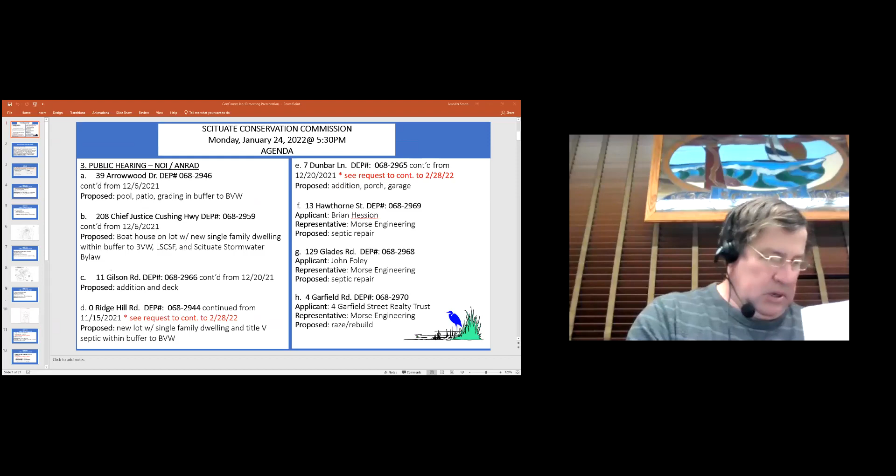On June 16th, 2021, Governor Baker signed into law an act extending certain COVID-19 measures adopted during the state of emergency. This act includes an extension until April 1st, 2022 of the remote meeting provision of his March 12th, 2020 executive order superseding certain provisions of the open meeting law.

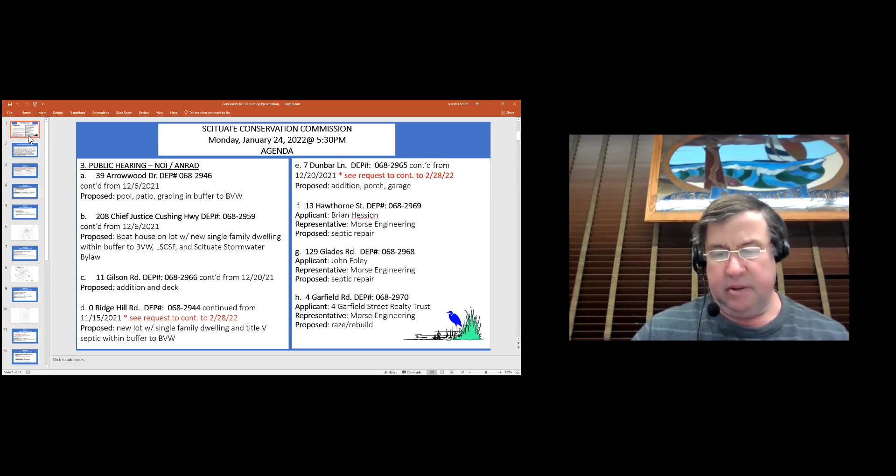So we have 39 Arrowwood.

Oh, is that Mr. Marabito? I was looking for Marabito. Oh no, here's Brad Holmes. Maybe he'll be speaking for the applicant.

Good evening, members of the commission. Brad here. Wanted to just get in front of the commission quickly. We're going to continue the meeting so we can provide some more information that Amy forwarded to us last week. I did get a chance to speak with Amy, but since we're on the agenda, I figured it would be a good idea to brief you on what changes have been made so hopefully it will go smooth through the process and the next meeting will be more efficient.

So as you remember, we have a pool and patio proposal here at 39 Arrowwood Drive. It's within the 100-foot buffer zone to bordering vegetated wetlands. The project has been revised to relocate the proposed pool and associated patio with retaining wall further north of the house and further outside of the buffer zone, so that about half of the project is outside the 100-foot buffer zone, and we're about 80 feet away from the BVW.

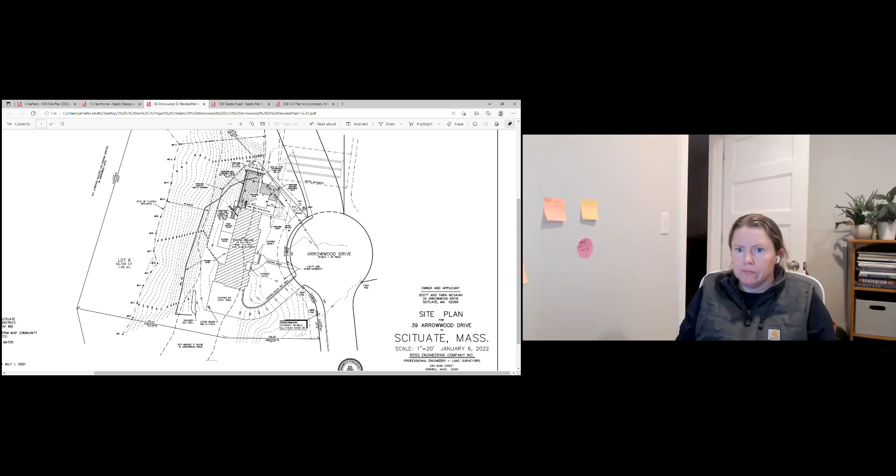Okay. Penny? No, just waiting for the information Amy asked me for. Thank you. Jen? Yep, I'm good. Brendan? I have no questions.

Amy, is this before the ZBA as well? Yes, is this the one? Yes, it is. And one of the things I was hoping—which was communicated actually via email to the applicant, but we could reiterate—is that this is a positive change that they've made. And I would say that they should definitely move forward with getting the additional detail and then back to the ZBA to see if a variance can be granted for the zoning regulation that prohibits this type of disturbance on these slopes in the Water Resource Protection District.

Because I think that's important, but it's moving in the right direction. It looks like you should be able to go with orders on this once we receive additional detail.

Okay, when do we want to continue it to, Amy? Before that, do we have anybody in the audience, as long as we have this open? Is there anybody that wants to speak to this?

No. Okay, Brad or Amy, how much time do you think we need? I had written down March 7th. Is that okay, Brad, with you?

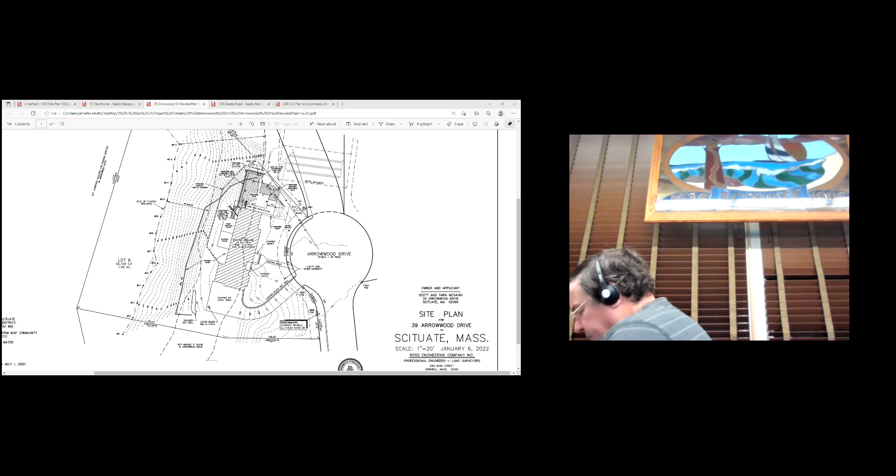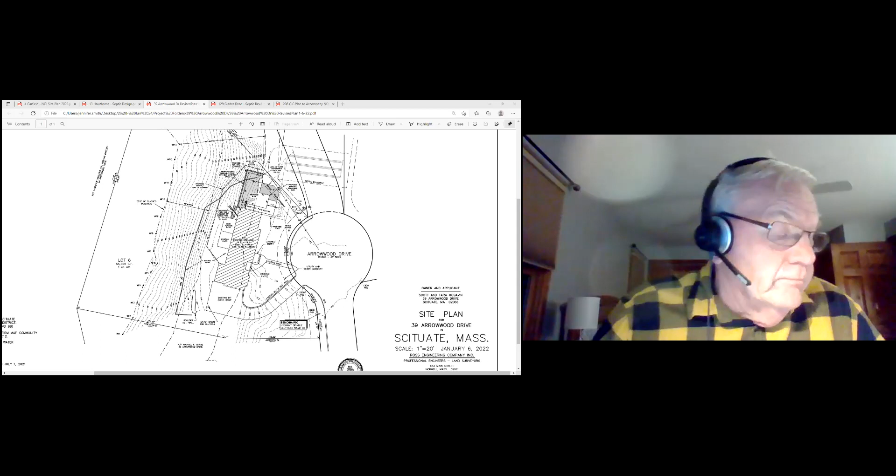Frank, does it have to clear ZBA before us, or do we go before them? It should clear, I think. They're looking for all other direction from permitting agencies before it comes back. The ZBA has asked us to get through conservation first before we go back to them because we're kind of in that catch-22 scenario.

There was a letter from the chairperson of the ZBA on this one, wondering what our issues were and could we move forward. So I don't want to leave someone in that lurch.

I think it's important that we've now shown the ZBA that this is something we'd have less concern about, and can probably condition with additional information, which should be good enough for the applicant to go back to the ZBA and see if they can overcome the variance that is required.

Well, do we have a lot on for the 28th? Just to hopefully move this, this has been out there for a bit, and it looks like they made pretty good changes. Do we have a lot on for the 28th yet?

Yeah. I had written it down as the 7th. But if you want to put it on the 28th, that's somebody that's not going to get to go on the 28th, but that's fine. Well, this one's been out there for a while, so.

So I'll make a motion that we continue 39 Arrowwood -- hold on a second, we do have a hand up here somewhere. Oh, I think you gotta press the button. Yeah, sorry, it doesn't let me unmute myself.

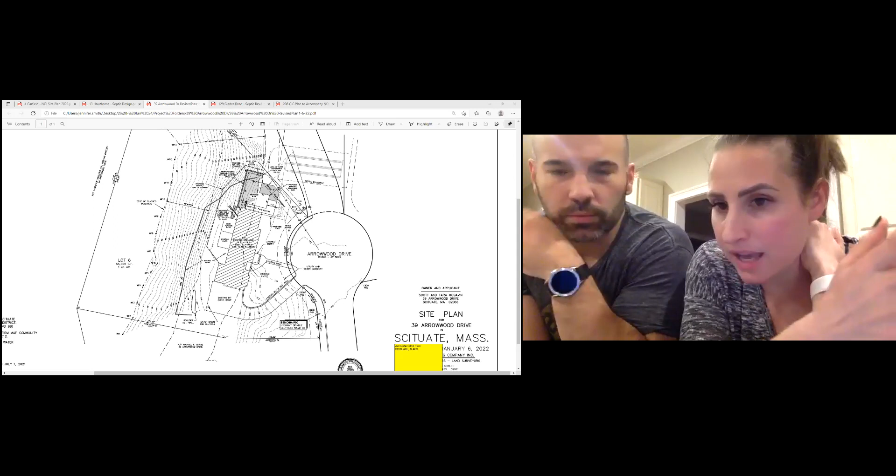Yeah, we just wanted to know, because Anthony Bucari from ZBA had specifically requested we get approval from the commission before going back to ZBA, would we be able to get anything from the commission in writing that we could forward to the ZBA before we go back to them again and then they send us back?

I've already sent it, in the email I sent to Brad. Okay, that should be fine, Tara. Okay, all right, thank you, Amy.

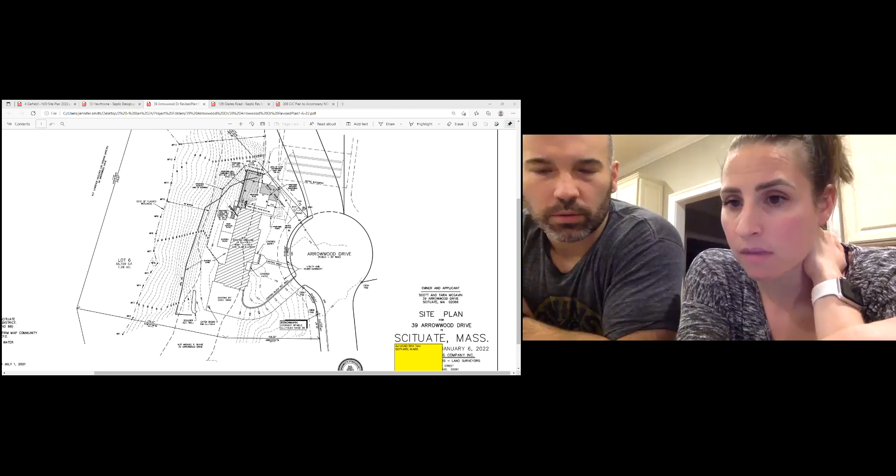All right, okay, so Penny, you have a motion to continue to the 28th. Yes, I make a motion that we continue 39 Arrowwood to February 28th. Okay, do I have a second? I'll second it, from Richard. Yep. All in favor? Jen, yep. Brendan, yes. And Frank, yes.

Okay, thank you, thank you very much. Thanks, two other ones, yeah. 208 Chief Justice Cushing. Somebody from Morse Engineering?

Anybody there? Yeah, I have Greg Morse and also Peter Palmieri on the call. Oh, good, just got unmuted. Good evening, this is Greg. Hi, Greg, good evening.

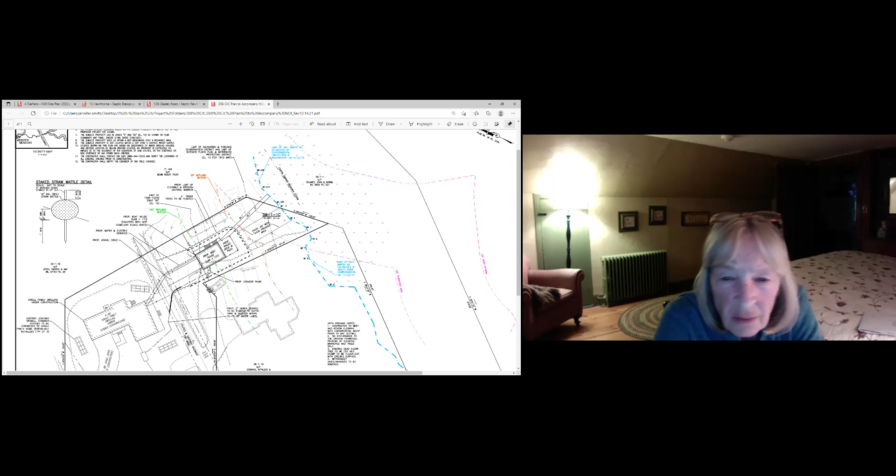You want to start, Greg? Sure, this is a continued public hearing for 208 Chief Justice Cushing Highway. To refresh your memory, my applicant, Sean Pacheco, is the property owner here. He began construction on his single-family home last year. This year we made application, however, for a detached boathouse. It's approximately 20 feet by 30 feet. It's located inside the buffer zone, which prompted us to file a notice of intent.

The wetland resource areas out here -- you had us retain Sabatia, Bob Gray, to go out on behalf of the Conservation Commission and review the wetlands.

I believe Bob Gray is in agreement with the wetlands we delineated on the site, which consisted of a bordering vegetated wetland, shown in blue, and the riverfront area, shown in purple. We're outside of the riverfront area with the boathouse, and the FEMA flood zone also traverses the site. Addition of this boathouse also put the project into a stormwater bylaw requirement.

The home construction was exempt from the bylaw because the home itself disturbed less than 15,000 square feet of land. However, when we added in the boathouse, it put us over that 15,000 square foot threshold.

Mr. Pacheco, when he built the house, had already installed significant roof dry well systems to infiltrate the roof runoff, even though he wasn't subjected to the stormwater bylaw. We'd add that this site would not be subject to rate and volume control, as it discharges to land subject to coastal storm flowage anyways. The soil out here is sandy.

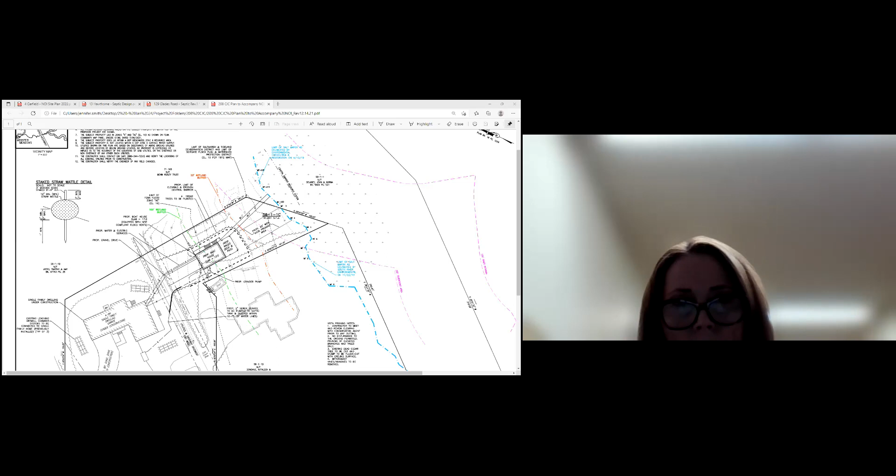So I don't see him on the call right now unless he's on a phone number. Peter, can you somehow identify yourself? Otherwise, I'm not sure if we should come back to this, but there were outstanding concerns relating to TSS removal and the entire site as a conglomerate, or an aggregate, I guess you could say. I was hoping Peter was going to speak, but I don't see him on. So maybe you should go through the commission. Oh, nope, here. Have you got them?

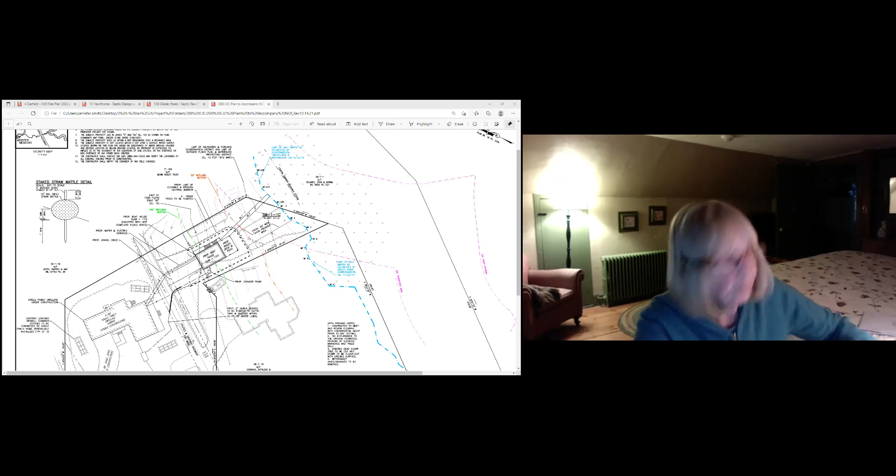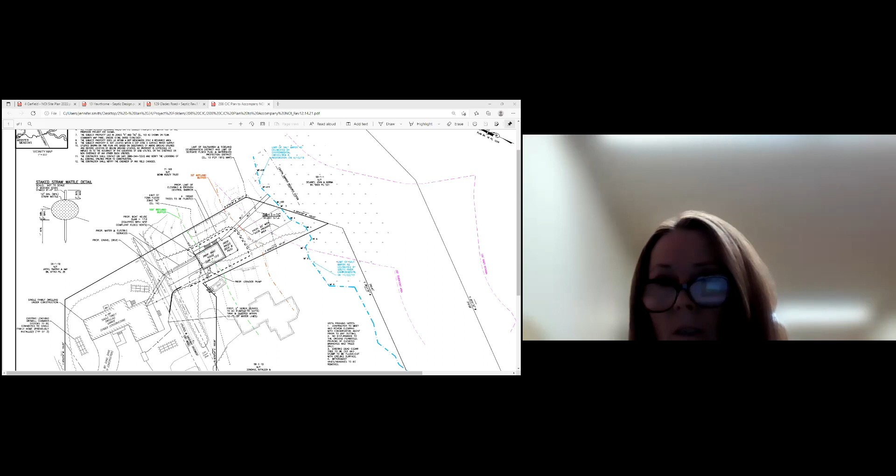Amy, we have Gilson Road and it looks like Greg's back on again for Zero Ridge Hill. So do we want to do Gilson Road? Yeah, that sounds good. Greg, and then we'll just circle back? That's fine. Well, yep, wait a minute, now there's a hand raised, so hold on. Joan Wyckoff? Yeah. Okay, hold on. You've got a Peter with his hand raised as well. Okay, we're going to go to Peter with his hand raised. Right, that's what I was going to tell you. He's there. Great, thank you. I was trying to get your attention.

Peter Palmieri from Merrill Engineers and Land Surveyors. As Greg has indicated, we did do the stormwater review for the project. As far as the post-development, pre-development, and recharge requirements, we're satisfied with the design as presented. We did have a question, though, relative to total suspended solids. Since this project, with the addition of the boathouse, exceeds the threshold for the stormwater bylaw, we feel the applicant should be addressing the TSS removal. Greg had indicated in an email that they feel there's a depression on the site which will perform this function, though I'm not sure exactly where it is. Maybe he could address that further.

I do think if the commission believes that both the single family house and the boathouse are one project, then the TSS should be addressed in some method or presented on the plan as something the commission members can digest.

Go flip back to Greg. Sure, I'm glad to speak to that. Thank you, Peter. We looked at this as two separate projects. We already have the building well under construction, including all of the site work associated with the building. The lot's been graded, the roof dry wells have been installed, the septic system's been installed, all utilities have been installed. The site is just short of loam and seed at this point. But other than that, the site is predominantly done associated with the house. The house did not require any review under the stormwater bylaw because it was under the thresholds. So when we made the application for the boathouse, that puts us over the thresholds. We look at the boathouse as being the trigger, and that should be the subject of the stormwater bylaw.

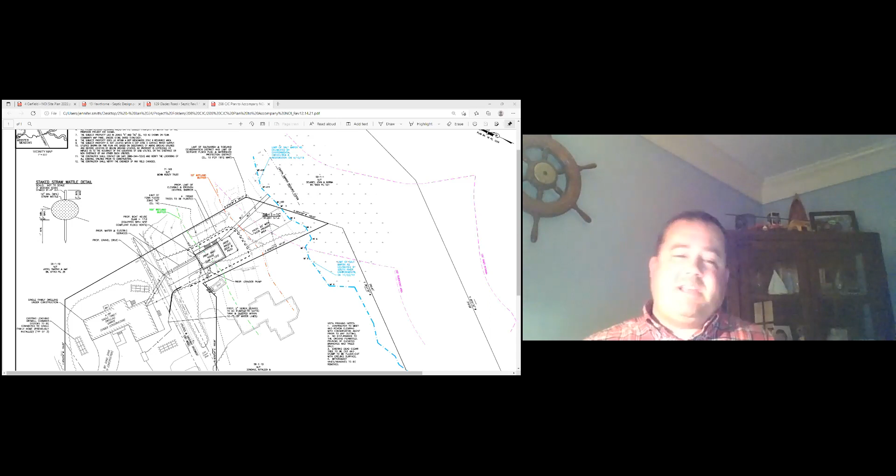TSS is not that big of a concern in a residential application. Off of a residential driveway, what are we talking about for TSS? There might be a little bit of sand if someone puts sand on their driveway for de-icing in the winter. But other than that, there's really not a lot of pollutant load we'd be concerned about with TSS removal on a residential driveway.

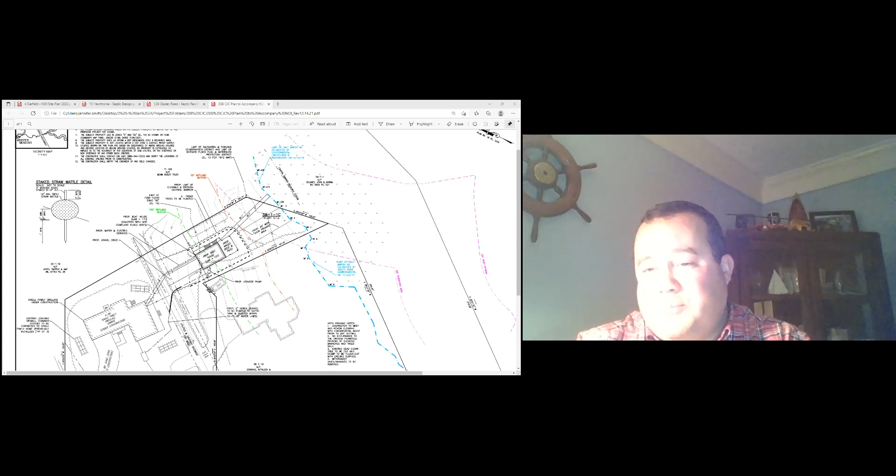This site, if you look at where the driveway drains to the front of the lot, there's a natural depression along the edge of Route 3A where it was built up. You'll see the existing driveway comes in at the bottom left corner of the lot. Just to the right of that driveway is where a natural depression exists. So if there were any suspended solids coming off this driveway, it would be trapped within the natural vegetation and utilize that vegetation out there.

I didn't see TSS as a big issue on this application, nor do I think that should be the subject of the review. I think we're here specifically for the boathouse, which doesn't propose any impervious surface that would have TSS whatsoever. It's a gravel driveway for the boathouse, and it's a roof, which is considered clean runoff.

I did email the conservation agent asking if there were any outstanding issues and asking this very question on January 7th. I was surprised that it came up tonight. I did not receive a response. I was not anticipating this being an issue this evening.

So Peter, with that being a gravel driveway for the boathouse, is the driveway gravel? Yes, the boathouse driveway is gravel. The driveway for the house will be paved, and it's going towards the road.

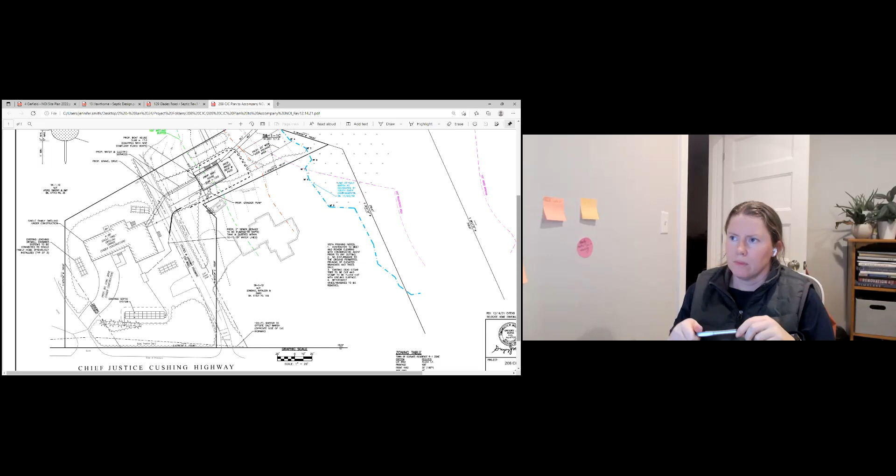They backed their way into the stormwater applicability with area of disturbance, and that's why it's important that they meet the intent of the stormwater bylaw.

As far as TSS goes, Peter and I were talking about the depression, where I'm still not sure if Greg answered it. Is the depression going to help with TSS on that part of the site? I don't think he did, because he's only addressing the boathouse, but maybe you can condition that depression by the side of the driveway to stay. I think this is a little bit technical and should probably be a sidebar between the engineers, but it's a single family residence and we shouldn't be spending an abnormal amount of time on it. Hope that helps.

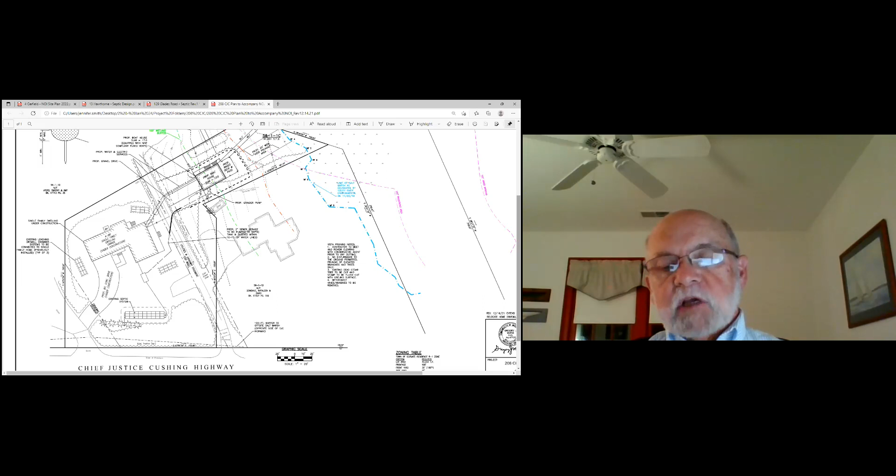First, I guess the question is whether the commission's going to view this as one, both the boathouse and the house as one project. If they are, TSS should be addressed. One way to address that could be that possibly some language could be submitted, maybe even an easement that would protect that depression so that it wasn't filled in and would continue to provide the TSS removal Greg had indicated it was going to provide.

Thanks for that, Peter. Brendan? Yeah, I guess it feels like a gray area, but I'm okay with this, like what Richard said.

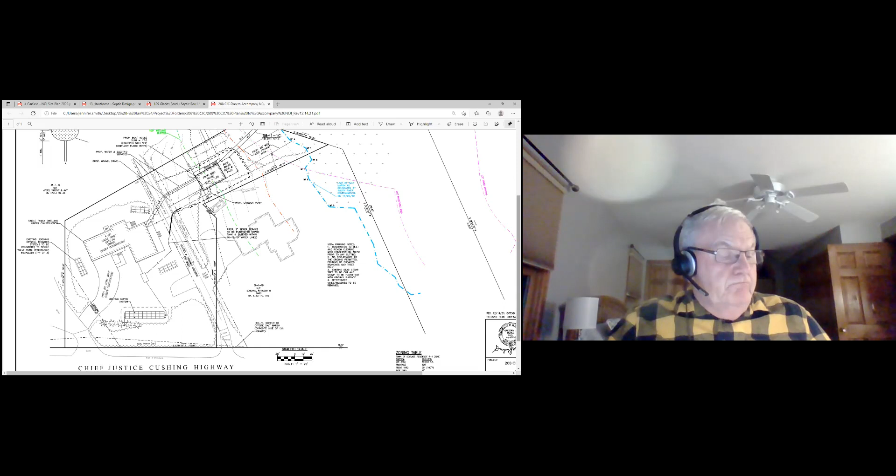Couldn't we, as Peter just said, make it a condition regardless that the depression has to stay? I think so. But before we try to solve the problem, I thought we'd hear from everybody. This just seems like it could be a solution, but I wanted to run around. I've got my thoughts on it, but I'm going to give everybody the opportunity to speak to it, like another round.

If the driveway was on the other side, I might be concerned. But the way I look at that site, when I go by, any runoff from that driveway is not going to get down to the marsh. It's going to come forward towards 3A. So I just don't see it as making it a problem. But put in the order that the depression will stay, then it takes care of it — there will be a place for any runoff to go.

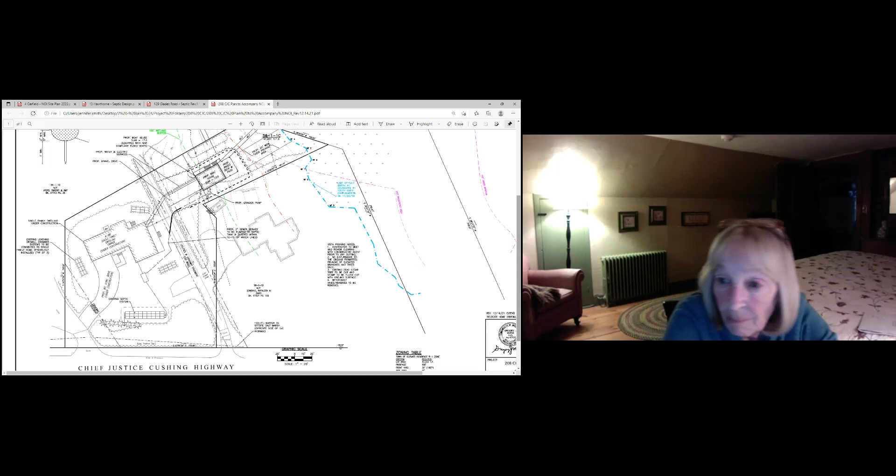If I may add to that, Greg Morse here. Along Route 3A at this location, there already is a 50-foot green belt in the Scituate zoning bylaw. We're not allowed to alter the grades or do any significant vegetation removal, so that depression absolutely will stay — that's already written into the zoning bylaw. That's why our limit of clearing is shown where it is. That depression will take all the TSS of 3A in addition to this site. There's no TSS coming off of a residential driveway.

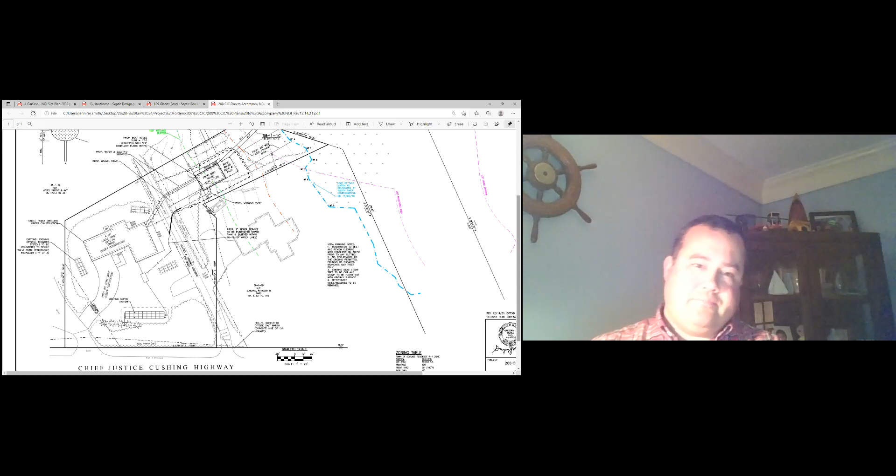Do we have anybody in the audience that wants to speak to this? I don't see anybody. Okay.

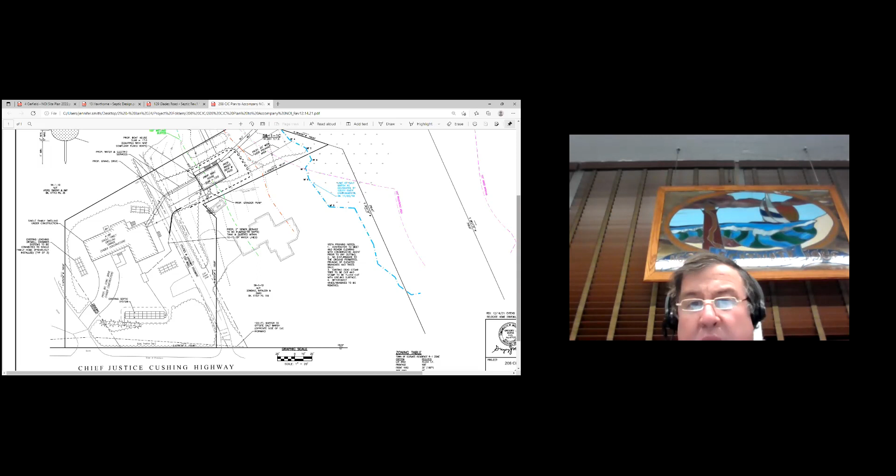Greg, I like to hear everybody's argument, and I think if this were a home being built or remodeled, and we were skirting on the threshold of substantial improvements requiring us to bring the whole house up to code, and we stayed just under that, then came back to the building inspector with an additional addition, the building inspector would tell us we had to bring it to code. I think that's how I would look at this project — it's under construction, it's another piece they added on, but I do think it needs to be treated as a whole. I don't think you can really come back with something like that.

That said, I understand the frustration with some of the regulations when it seems like overkill, adding too much to a project that could handle its own issues. We've had that happen several times — a tiny site that doesn't trigger stormwater can be more detrimental than a large site like this one. If Peter feels that's adequate to handle this, the rest of the site seems like they're doing a good job. I just wonder, and I understand the piece you're saying, that they shouldn't be able to alter anything within 50 feet of 3A.

Could this be something placed in the orders, or some definition? So they're going to be getting a stormwater permit as part of these orders, which triggered the stormwater bylaw, right? So it's going to act also as a stormwater permit, recorded under the deed of the property, and we can condition it. Okay, Peter, I appreciate your thoroughness in looking at this for the commission. I think I would agree with you, but if we can move this along, it seems like we're splitting hairs a bit.

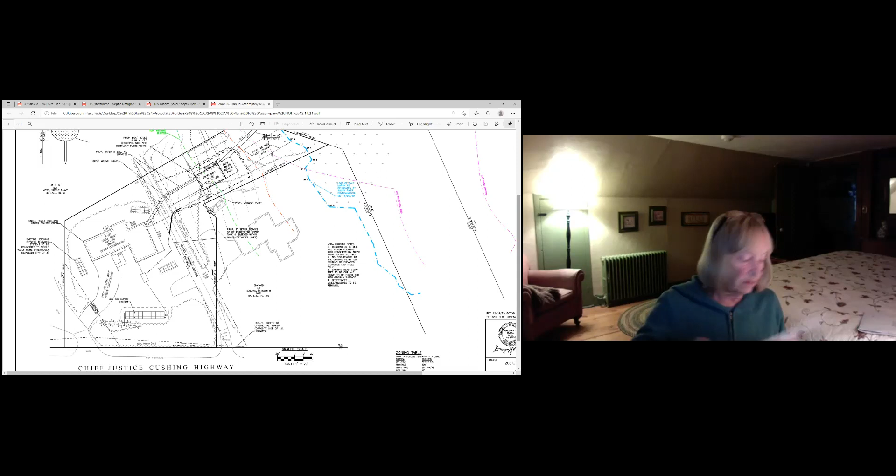Anybody have anything else to add? I'll make a motion. Penny, Amy, are we good to close this with those pieces in place? I think I understand everything. Okay, I'll make a motion to close, that's Penny. Do I have a second? Second from Jen, thank you. All in favor: Richard, yes. Brendan, yes. Frank, yes. Thank you very much. Thanks, Peter. Thanks, Greg.

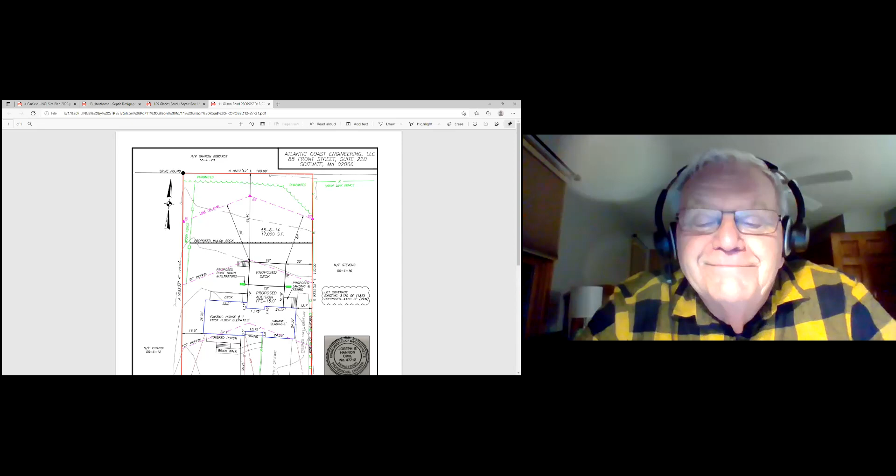Hello Jed. Okay, so if you recall, back in December, this is 11 Gilson Road, we had a few issues on the plans we needed to address. This project, just to refresh your memory, is for a proposed addition, 28 by 14 foot, along the deck in the rear, 28 by 18 with a staircase. There are no ZBA thresholds we need to address, it's compliant with ZBA setbacks. The proposed foundation has flood vents in accordance with FEMA requirements. The downspouts will discharge below grade with 3/4 inch stone detail. We addressed the 50-foot and 100-foot buffer concern that you folks had, as well as the lot coverage percentage.

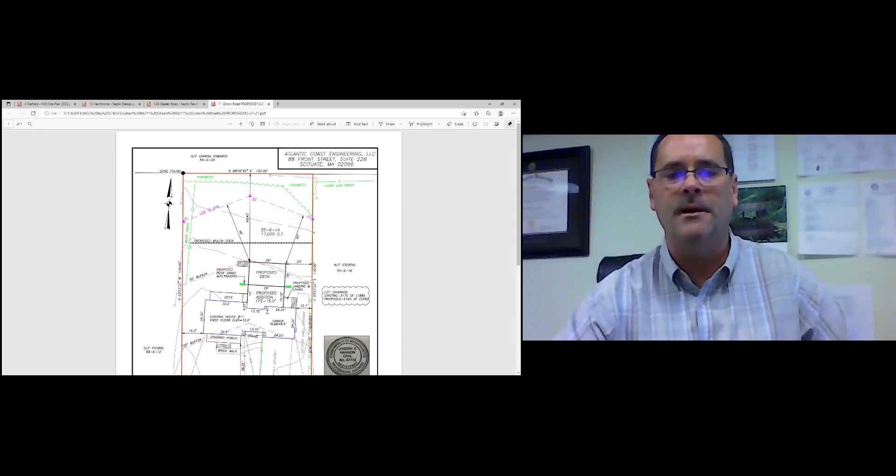If you look at the deck in proximity to the 50-foot buffer, one of the corners of the deck is about 40 feet from the BVW and the other is about 48 feet. If the commission's amenable to it as is, there's sonotubes proposed, but if it sounds more amenable, we can do helicals in order to eliminate any excavation. I'm sure you folks are familiar with that - it's basically like an auger bit that gets torqued into the soil below and has a very strong axial capacity. So at this point, I think we've addressed all the questions, comments, and concerns you folks brought up, and I'd be happy to answer any more questions.

Amy, do you want to comment on any of this first, before we go to the members? Well, sure, the big thing that happened was they tied flags on the site, and they're on the plan now, so you can see the closest distance to the deck, which is proposed under this notice of intent, is 40 feet. It's by footings, but it's also my understanding that because of construction costs, there's a good chance this project's not going to happen. But I think you're good to close.

Unless you want to see some improvements, given the encroachment into that 50-foot buffer, although it is on pre-existing lawn. Okay, well...

Jen, do you have any questions or comments? Sorry, it took me a second to unmute. I am always in favor of plantings for encroachment, so if there was something that happened there, that would be great from my perspective, but otherwise I'm good.

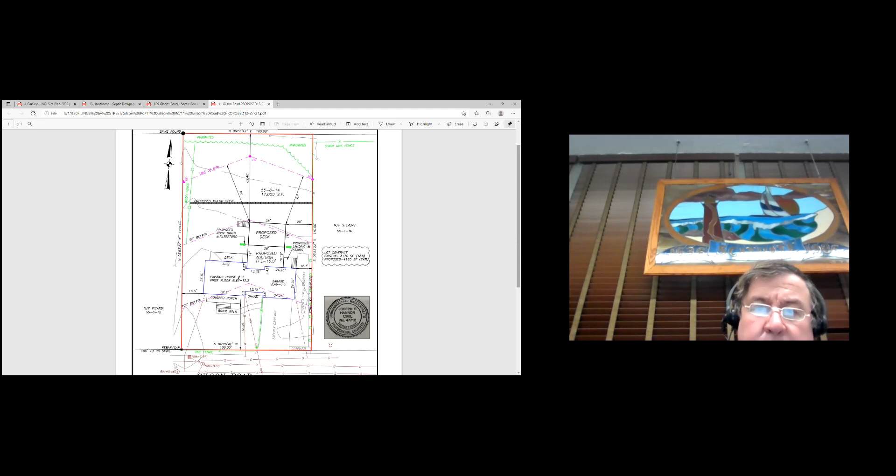Brendan? No, I don't have anything additional. Penny? Nope, I'm happy to see the plan with everything on it so we can see and understand it better. I think it's good to go. Richard? What Jen said, otherwise I'm fine, it's all grass.

Is there anybody in the audience for this one?

Being none, Frank said: Jed, a couple of things. The plan that got submitted the first time, to me, was kind of misleading. The arrows pointed to locations that would have indicated that both the deck and the addition were out of the buffer, which now with these lines on there, we can see that's not the case. So hopefully in the future, we'll get those things right the first time and save you and your clients some time.

And then I think it's good with the infiltrators. I'm really not that concerned about using helical piers over sonotubes, whichever is more economical, as long as the area of disturbance is minimal. But I do think that Jen and Richard both requesting some mitigation when we allow someone to construct something inside the buffer zone, that we get some mitigation for that. And there wouldn't be any reason that some plantings couldn't be placed.

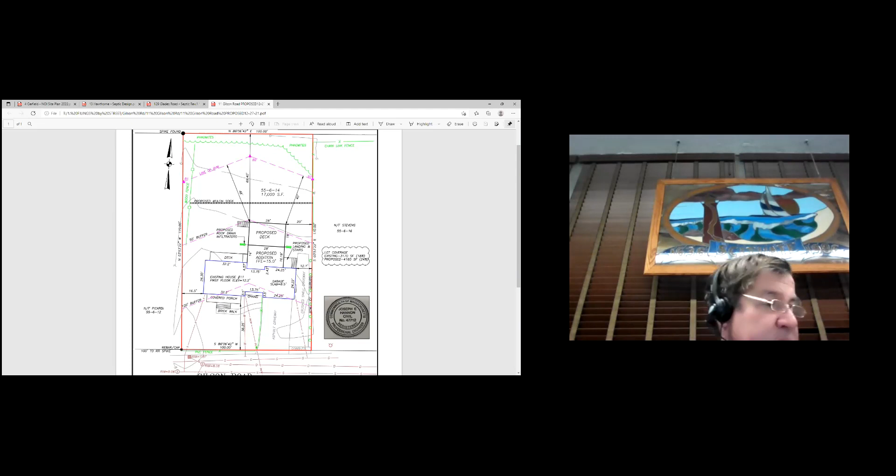Who delineated the wetland for you, Jed? Brad Holmes. I'm wondering if Brad could come up. I'm not opposed to closing this with something for mitigation, but something that maybe you and Brad could work out that the commission could approve. Yeah, absolutely. Thanks for the feedback.

And that stuff, we've done that with Brad in the past, come up with a mitigation plan for plantings due to disturbance in the BVW area. So yeah, that would be fine. I can certainly get with him and come up with a plan. If you folks would be open to closing, and we can get that over to Amy. Did I see somebody with a hand up?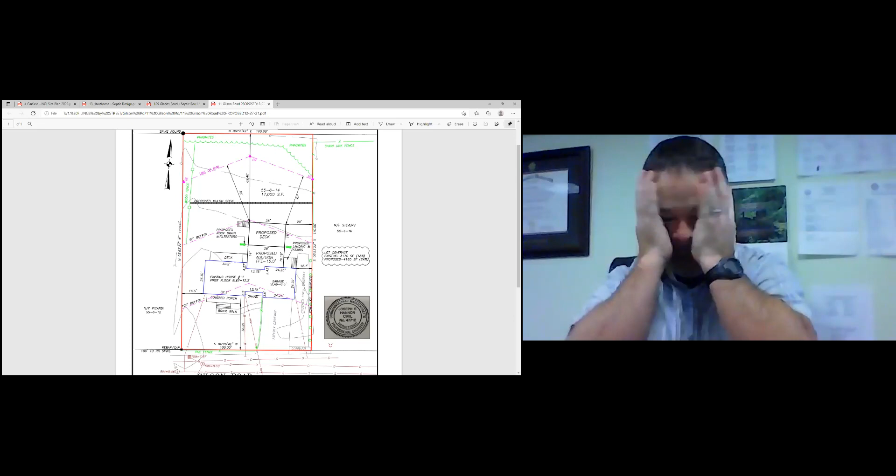Sure, understood. So this is fairly common to provide mitigation. Brad does this on a regular basis, and we work with him on this on other projects. So yeah, it's definitely something we could put together that you folks have seen before on other projects, and we'd prefer to close tonight, subject to receiving an acceptable offsetting mitigation plan for plantings and or phragmites mitigation.

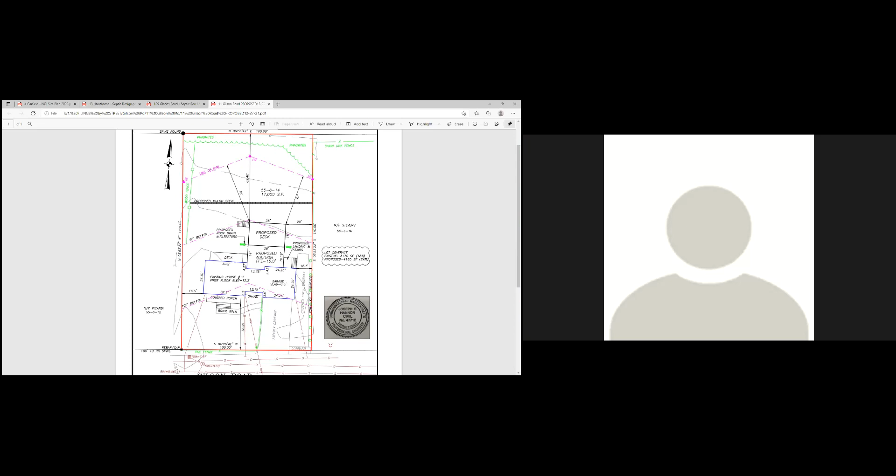Thank you. So it'd be closing with a condition for the plan that we just talked about, but that plan would go back to a meeting for your approval. Yep, okay.

All right, Penny? Yeah, just to let Jeb know, to tell Brad, I believe you're speaking of the Hadley Road phragmites. Yep, that they're cutting back. They just keep cutting and cutting. But talk to Brad, because he did come up with a good plan there, and it isn't a fortune. Okay, Jed? Okay, will do.

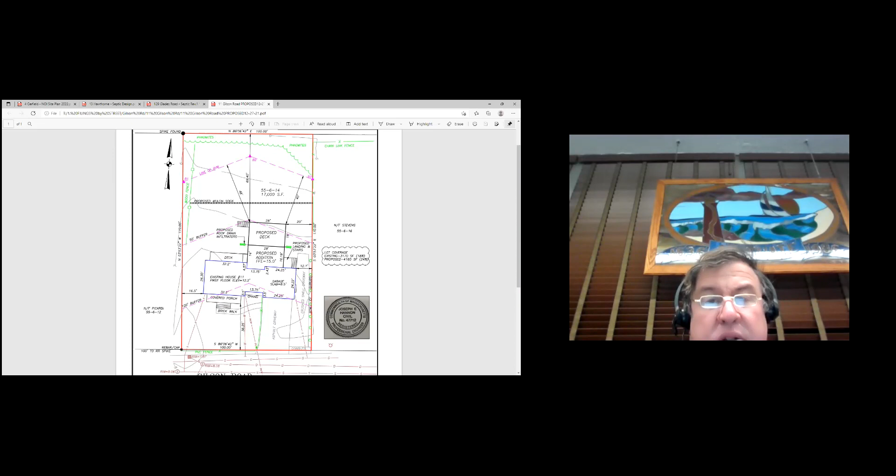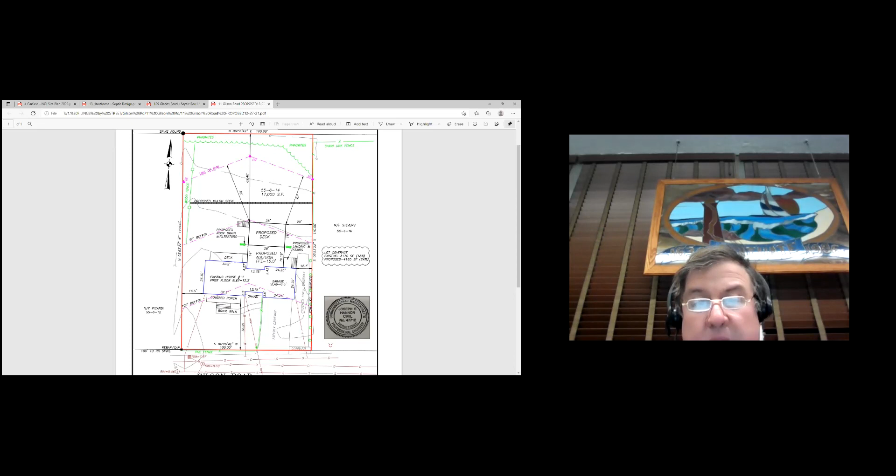All right, somewhere between all this, there's been mention of letting things become natural up to the BVW. There's cutting of the phragmites, there's some planting, so the commission's gonna have to approve whatever you put together. I think meeting with Brad and knowing those parameters, you guys could be creative and come up with something that would work for the property owner. Absolutely, okay, thank you.

I'll take a motion. I make a motion to close. Second from Penny. All in favor? Jen, yep. Brendan, yes. Frank, yes. Great, thank you.

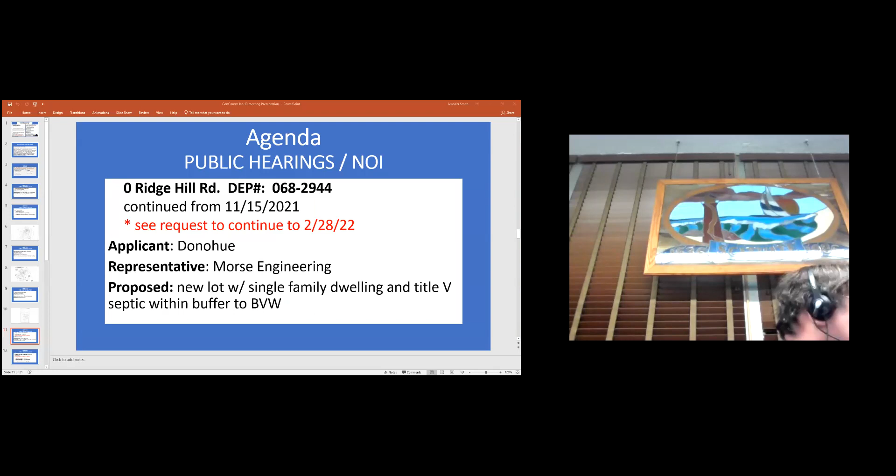0 Ridge Hill Road, that's continued. That is gonna get continued to March 7th. I make a motion that we continue 0 Ridge Hill to March 7th. All in favor? Richard, yes, you made a motion, I needed a second. I second that, thanks Brendan. All in favor? Richard, yes. Jen, yep. Frank, yes. Thank you.

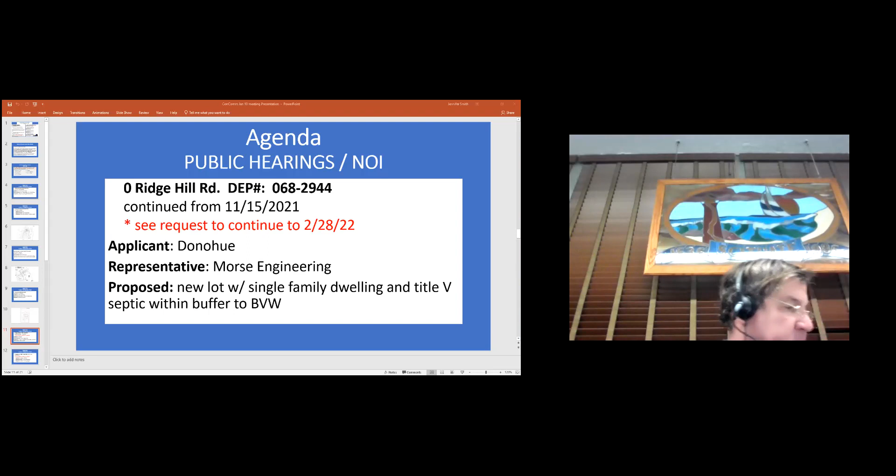7 Dunbar Lane, and the applicants requested that we continue this until the 28th. Amy, I know we've gotten lots of input from abutters and there's a lot of concern for this, so are the abutters aware or will they be notified? Yeah, we'll keep them in the loop. So this one's gonna be February 28th. Okay, sounds good. I make a motion we continue 7 Dunbar to February 28th. Second from Jen. All in favor, Richard, yes.

Brendan, yes. Frank, yes. Wait, 13 Hawthorne, someone's hand was up. So who was, do we have a, Greg Davy has his hand up. Okay, Greg, can we let him in? Who is he? I'm an abutter, Greg Davy. I'm an abutter at 51 Parish Road to the right, the 7th property.

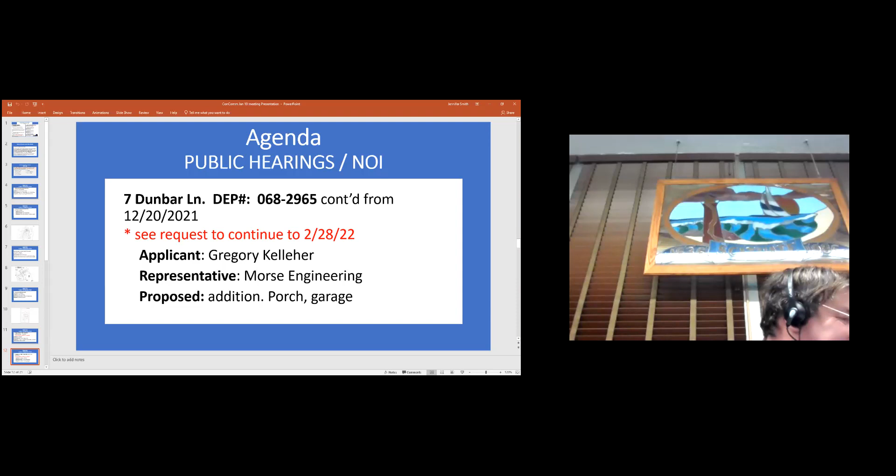Okay, I'll second that. Thank you. All in favor? Richard, yes. Jen, yep. Frank, yes.

Okay, so 13 Hawthorne, septic. This is Morse Engineering, so I'll get started.

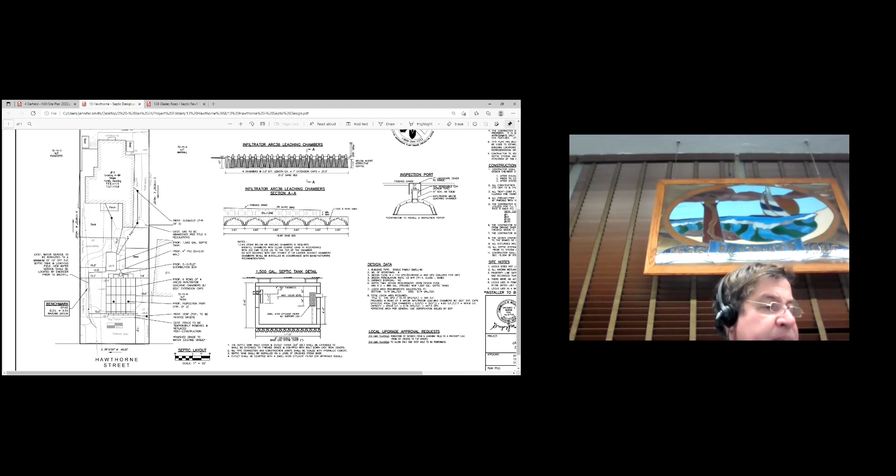On January 24th, 5:30 PM, the Town Hall, Scituate Conservation Commission will hold a wetlands hearing under Chapter 131, Section 40, Mass General Law, and Section 30700, Town of Scituate Code of Bylaws, regarding the application of Brian Henson for work related to septic repair at location 13 Hawthorne Street, Scituate. Abutters and other interested parties are invited to attend. Information on access to virtual meetings is available on the agenda posted on the town website.

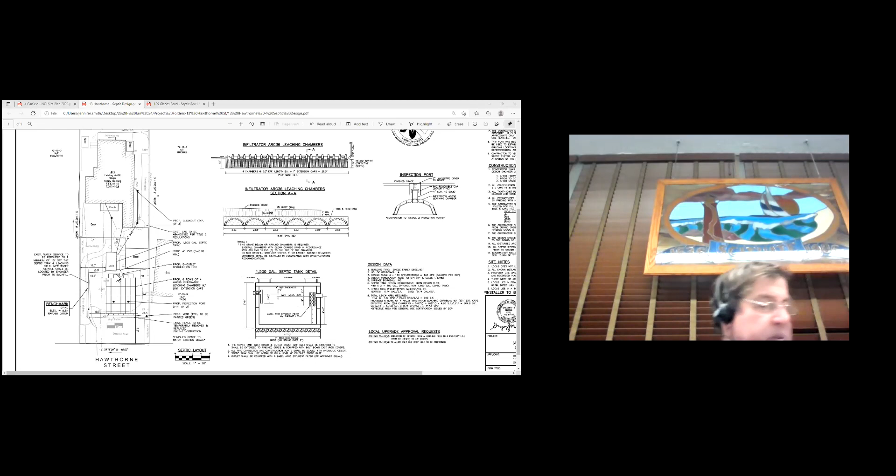Easy, Penny. So we have Brian, Morse Engineering - sorry, this is Greg Morse, registered engineer, Morse Engineering, representing the property owner, Brian Hessen. This is a septic system repair project located at 13 Hawthorne Street, in the Humarock section of town.

The existing home, as you see on the site plan, is an existing 4-bedroom home. It's located in the FEMA flood zone at AE elevation 13. For reference, the site varies between elevation 9 and 10 on the ground. The existing septic system is a series of 2 cesspools located in the backyard.

The proposal is to put in a Title V compliant system consisting of a new septic tank, a distribution box, and leaching chambers. The grading over the system where this is proposed is currently lawn surface. It would go back as lawn surface. There's really no change in the topography - the existing versus proposed contours remain the same. DEP had no comments on this. I turn it over to you.

Thank you. Brendan? Or Amy, you want to tell us what your thoughts are? Yes, okay, so...

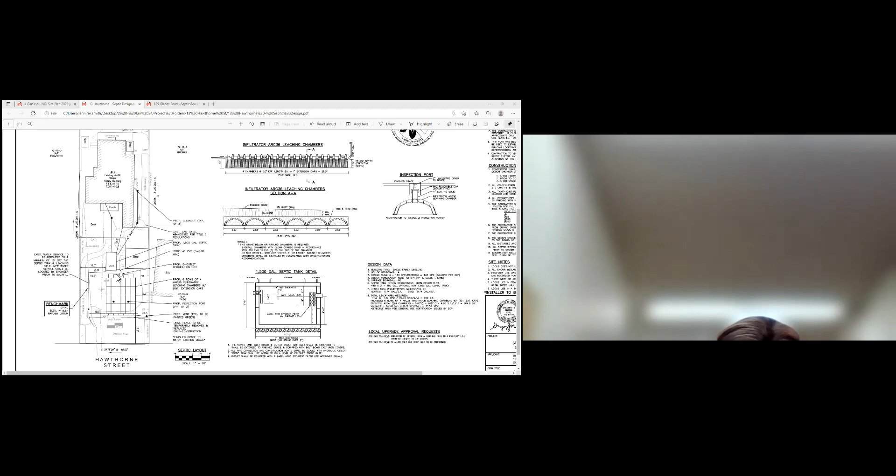Septic improvement, no board - I mean it has board of health approval, no DEP comments, appears to meet the requirements of the Wetlands Protection Act and Scituate bylaw for the Barrier Beach flood zone.

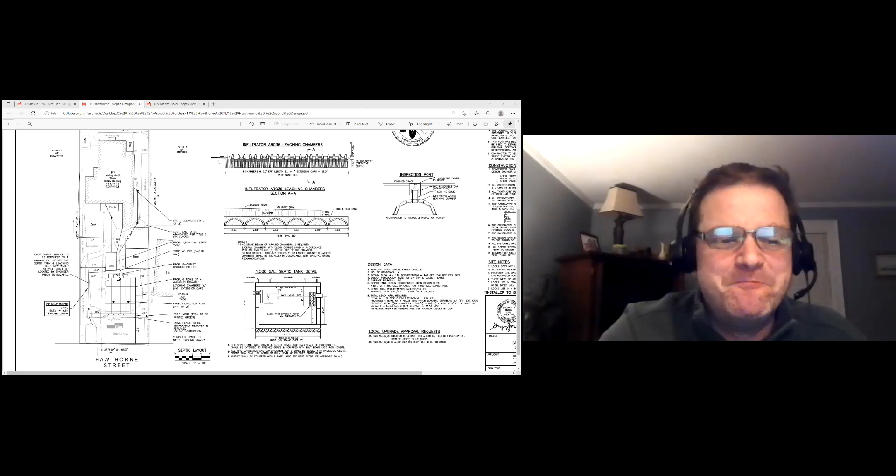So, Brendan? Going first, I really want to have a good comment. This one's a fairly simple one. Yeah, it was like, oh, no comment - everyone else said everything great, so I have nothing. Oh, it's good to say something like, a new septic system's a major improvement and protects the groundwater. This is great, I'm glad to see it. Thank you, there you go.

Jen, you want to add to that? Of course. I'm looking at it, and I know sometimes it makes sense and sometimes it doesn't, but do we need erosion control anywhere here? I'm just not sure if I'm seeing it.

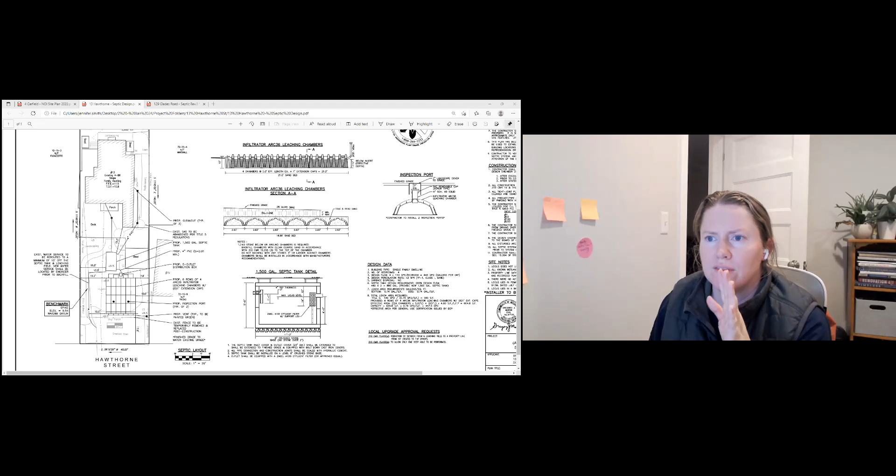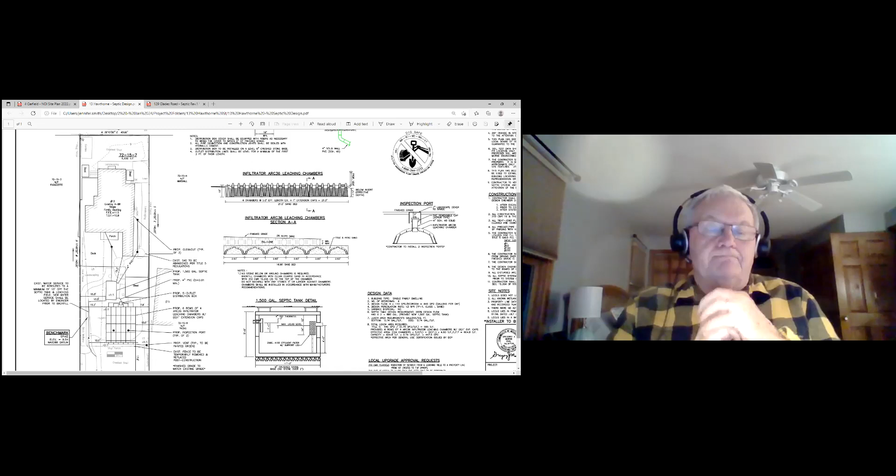I don't think on this site. No. These are right, really tight sites. You're right, gravel. That's fine - there won't be any need at all. Unless they overstep their bounds onto their neighbors, then they'd need a fence instead of erosion control. No, there should be enough room to do everything without any problem. It's very flat in that area. I don't know why I didn't go to Richard first - he's the expert down there. Don't know about experts. It's a really nice location, nice house, and this is needed, so it's good.

Anybody in the audience? I'm good with everything here.

Seeing none, take a motion to close. I'll make a motion to close. Richard, second? Second. Penny got it. Jen, yep. Brendan, yes. Frank, yes.

Thank you. Thanks, Greg. Thank you.

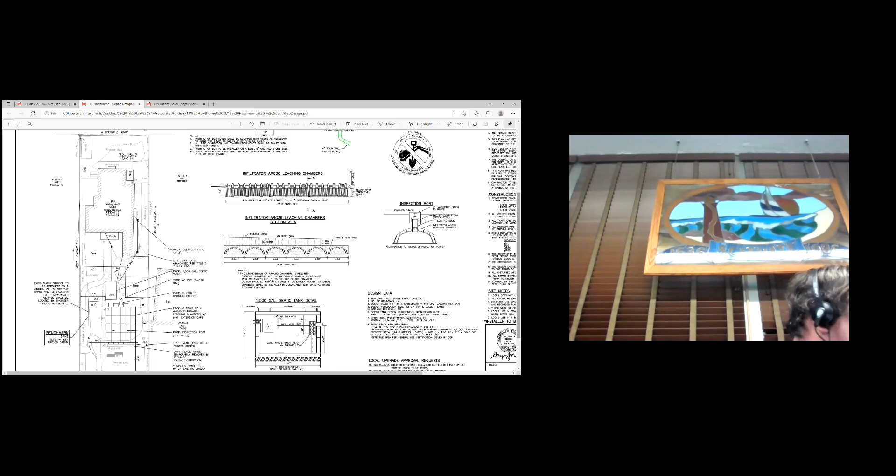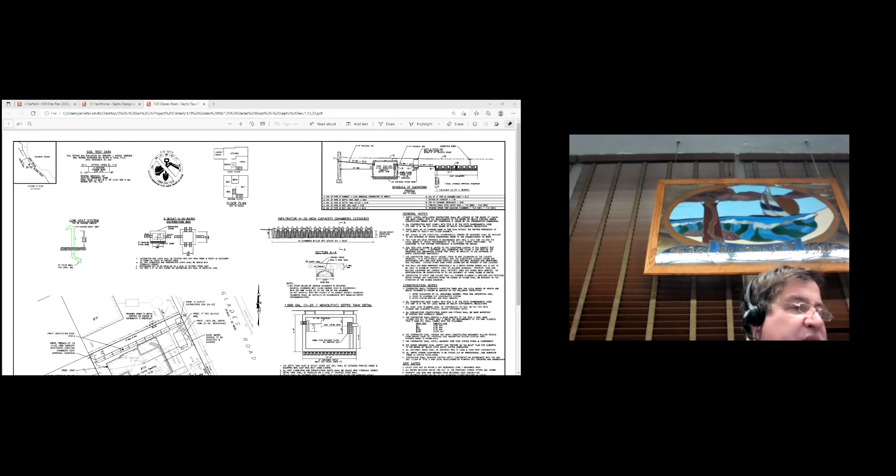129 Glades Road. On January 24th, 2022, 5:30 PM in the Town Hall, Scituate Conservation will hold a wetlands hearing under Chapter 131, Section 40, Mass General Laws, and Section 30700, Town of Scituate Code of Bylaws, regarding the application of John Foley for work related to septic repair at location 129 Glades Road, Scituate. Abutters and other interested parties are invited to attend. Information on access to virtual meeting is available on the agenda posted on the town website.

Jen, this isn't any relative, is it? It is not - I was going to say that. My dad's name is John, and so is my brother, but we are not related.

Okay, all right, so want to move on to that one? Sure. Greg? Yep, Gregory Morse, registered engineer, Morse Engineering, representing John Foley. Again, this is a septic system repair project at 129 Glades Road. It's an existing 3-bedroom, single-family home on the lot. The lot itself is relatively small, approximately 3,500 square feet.

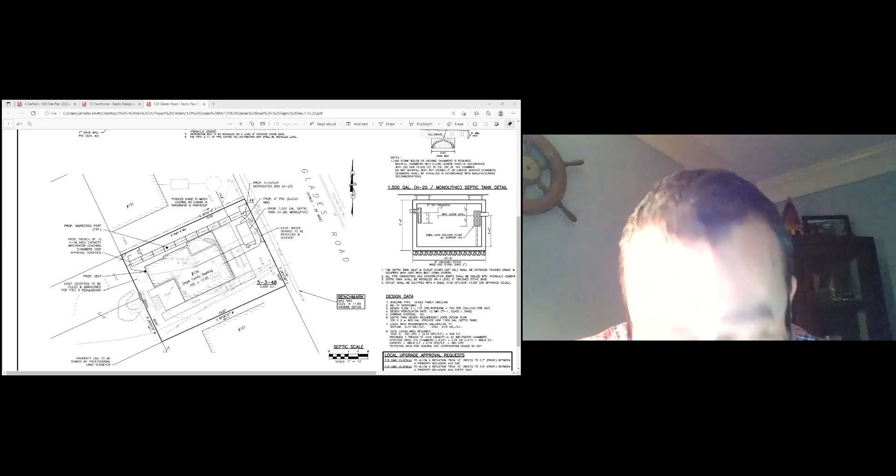It's located in a FEMA AE floodplain at elevation 16, while the topography on the site varies from elevation 10 at the back to elevation 12 along Glades Road. The existing septic system is a cesspool immediately behind the house. The proposal here is to install a Title V compliant system consisting of a 1,500-gallon septic tank in the front yard, a distribution box, and then a series of leaching chambers down the side lot line.

Turn it over to you for questions or comments. DEP had none. Okay.

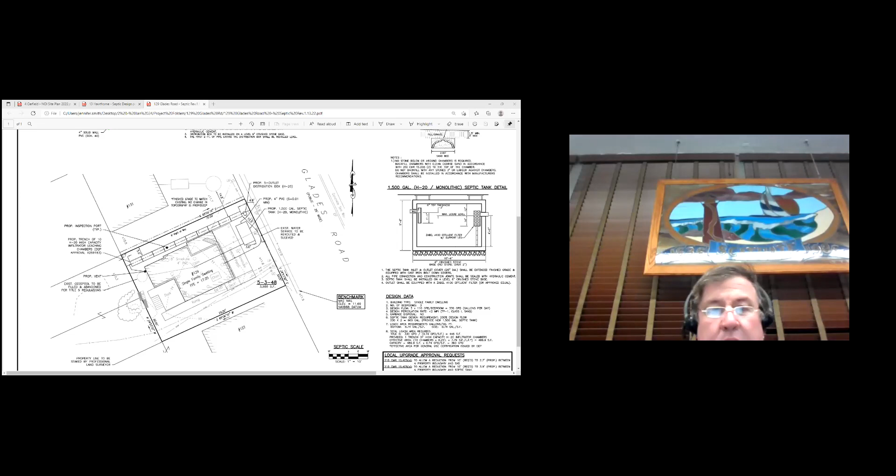Concurring with what Mr. Morse just said, essentially the Board of Health has approved the septic system. No DEP comments, just a couple additional notations. Obviously it would be a big improvement over a cesspool to have a compliant Title V system, so it's necessary. It looks like this house had the for sale sign up, so I don't know if it's pending sale or what have you.

I would note that it doesn't appear that it's elevated currently in accordance with FEMA height guidelines, and the house is pretty much in disrepair. It looks a little bit weathered. And to the extent that there are any existing retaining walls or solid walls on that site, those should be removed. So we could make that a condition.

The solid walls that are on the site are portions of the foundation. They are structurally attached to the foundation of this house, so those cannot be removed, anything under the house there. Those are the only walls that you will see out at the site. There are no retaining walls elsewhere on the site. Everything that you see is attached to the foundation and needs to remain.

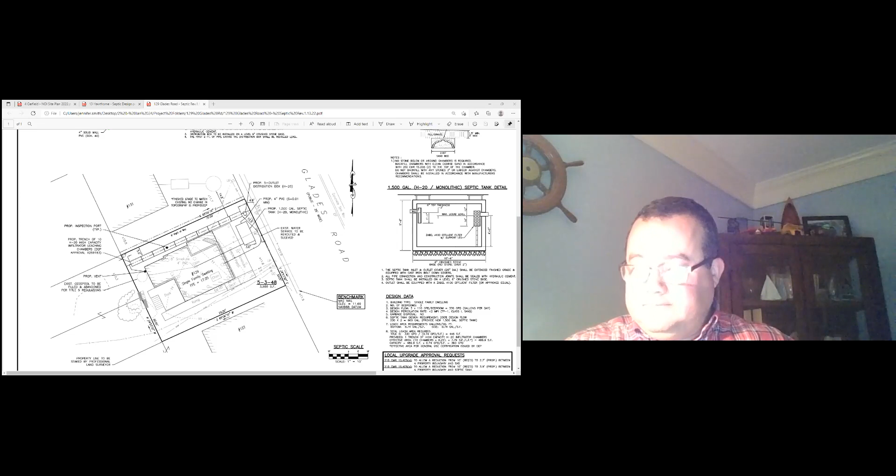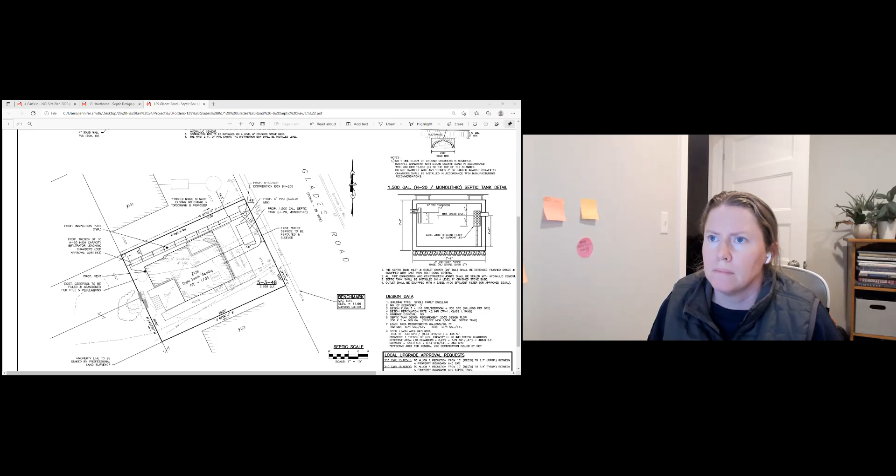Okay. Well, Jen, this is your neighborhood. Yeah, I don't think I have anything to add on it. Yeah, I think that's it. Okay.

Brendan? This is going to be a great upgrade, I'm looking forward to it. I'm all for it, thank you, I have no other questions. Yay, Brendan. Penny? I'm all set, thanks. Richard? There's nothing I can say after Brendan. It's good.

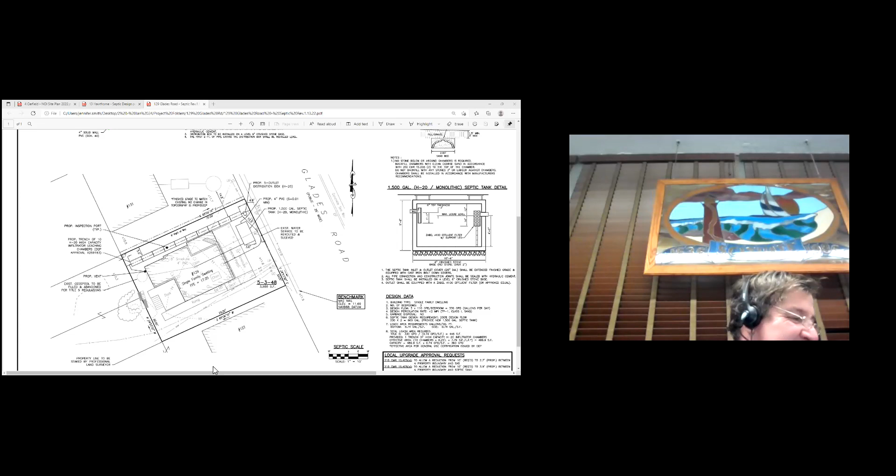Anybody in the audience for this? Okay, I'm good. Go ahead, Penny. I make a motion to close. We have a second. I second it. All in favor? Jen? Yep. Richard? Yep. Frank, yes. Great. Thank you, Greg. Thank you. For Garfield.

Let's see, oh, I know this house. On January 24th, 5:30 PM, the Town of Scituate Conservation Commission will hold a wetlands hearing under Chapter 131, Section 40 of the Massachusetts General Laws and Section 30700 of the Town of Scituate Code of Bylaws, regarding the application of 4 Garfield Street Realty Trust for work related to raise and rebuild a single-family dwelling at 4 Garfield Street, Scituate. Abutters and other interested parties are invited to attend.

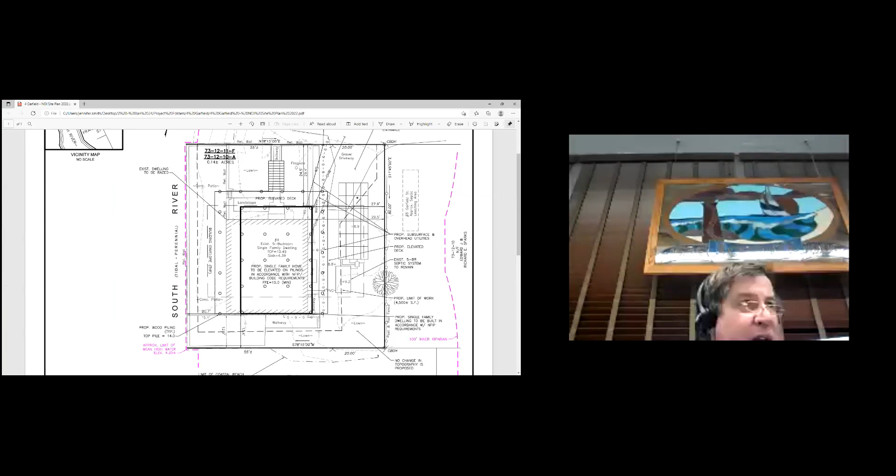Information to access the virtual meeting will be available on the agenda posted on the town website. Jen, how come sometimes when we list these addresses we say Scituate and sometimes we say Humarock? Just curious. No comment, go ahead Greg. For the record, I'm assuming we're in both. Gregory Morse, registered engineer, representing Kevin McDonough, the trustee of the 4 Garfield Street Realty Trust.

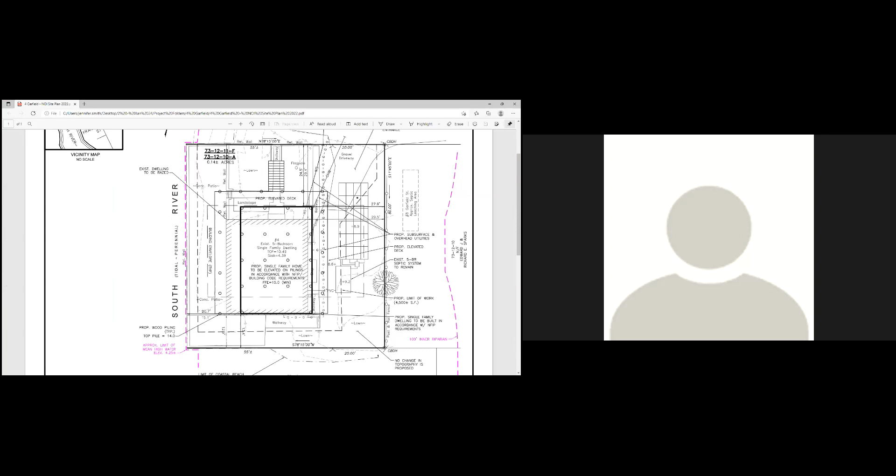This is a raise and rebuild for a single-family home located at 4 Garfield Street. For reference, Garfield Street is at the top of the page. On the left-hand side of the lot is the South River. This lot borders directly on the South River. The black bold line represents the property line. This lot is approximately 5,620 square feet. Depicted in light gray is the outline of the existing home at the site.

You'll notice to the right of the home is an existing septic system. That system is relatively new, approximately 5 or 6 years old. The proposal is to take down the existing home and construct a new one, largely in the same location. However, we've pulled it back from the river so the main box is approximately 6 feet further inland than where the existing home sits. The new home would also be elevated up on wood pilings.

This site's resource areas are within the riverfront area associated with the tidal river. It's also within the FEMA AE zone at elevation 14. Being in an AE zone, you're required to be a minimum of a foot above floodplain for freeboard. We've proposed our first floor at elevation 15 to provide that FEMA compliance. I'd turn it over to you.

The topography here is going to remain unchanged. It's a well-established lawn around the site. The septic system remains, it just gets reconnected to the new home. Overhead wires and water service just get disconnected temporarily from the existing home and then reconnected to the new home once it's in place. And I'll turn it over to you.

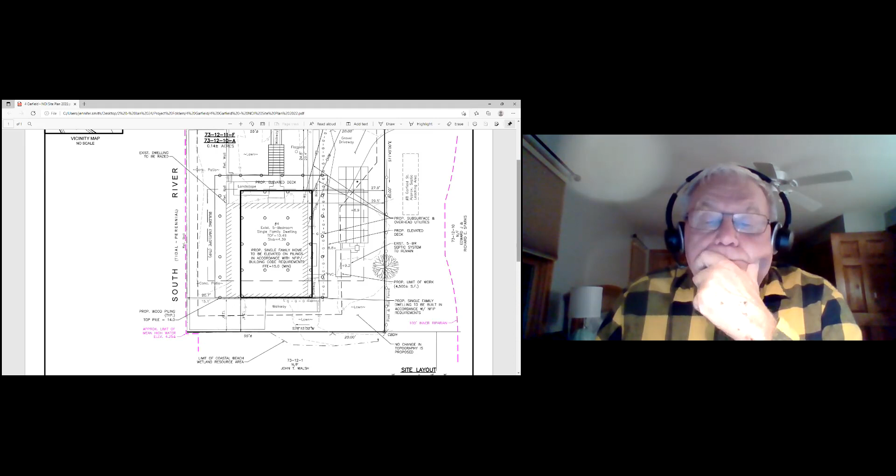Penny? No. Jen? This would be a good time for your previous question. I don't even remember my previous question.

Oh, right, yes. Some of the pictures online show, which is reflected here in a concrete patio on the plan, but are they leaving that exactly as it is, or are there any plans to adjust that?

I don't know, I'm not a builder, I don't know how you demo and build a house directly on a patio. So right along the river itself there's a retaining wall, and off of that retaining wall, between that and the existing house, is a concrete patio. I think it has some flagstones attached to it as well. So that would all remain in place. They would simply cut out the locations where the piles are being driven, and then patch the concrete around them. But the intent here is for the patio to stay. Okay.

And no other patios or impervious surfaces? Just off the front of the building, or the front deck there, we have a set of stairs coming down to the existing walkway at the front of the site. But other than that, no, nothing else, no other patios.

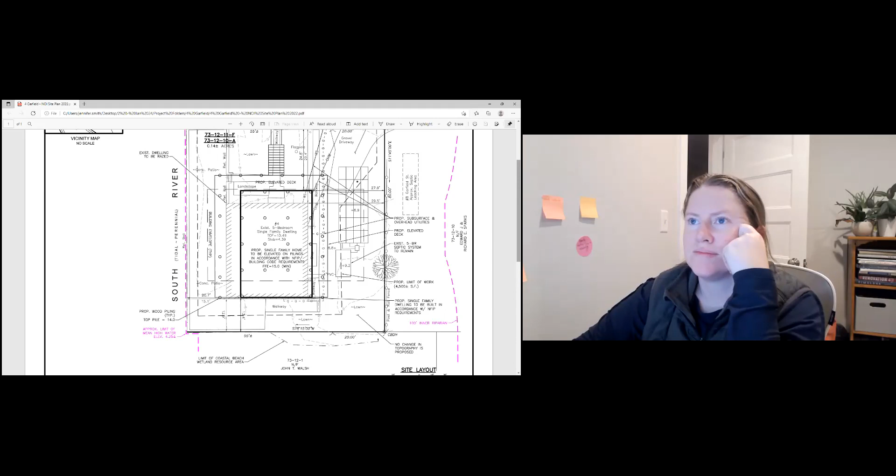All right, um, I'm good. Brendan? Thanks, I'm good, thank you. Anybody in the audience?

It's a couple of things, Greg. I think there should be something, especially if the back of that lot is right up against the coastal beach, whether it's a silt fence, if that's a better way to manage that. But I understand you don't have much disturbance with a lawn, but I'm assuming you got to go in with some kind of excavator or dozer or something and dig out that existing house, right? Yeah, they'd break up the foundation under it. Yeah, and then fill, and then you're going to be filling that in. So there'll be material disturbed.

So I think at a minimum across the back, and then maybe returning up the sides at least 20 feet or something. I know you're not going to go very far over that septic system, so you don't want to damage that.

But the other side's got the patio. So then looking at the plan, the existing house had the patio poured right up against the house. Is that right? Yes, it went right up to the side of the house. So now you're shrinking the house.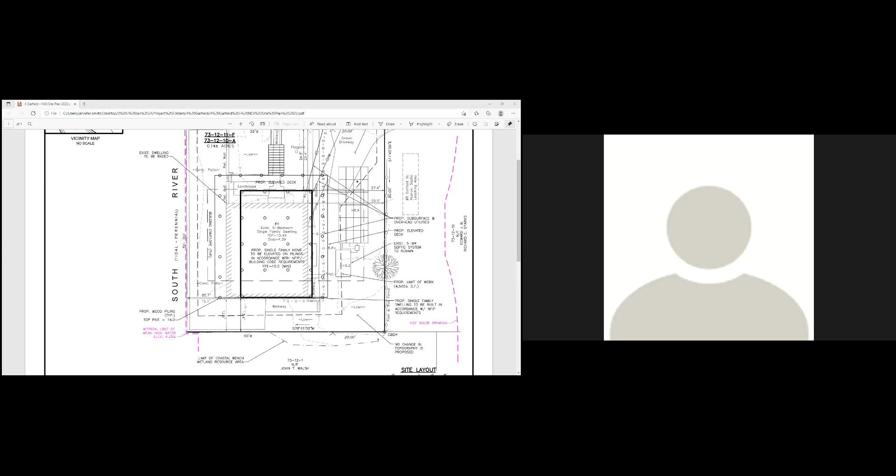Okay, so let's start with the side. I'm looking at this plan to the left towards the concrete patio. Yes, so there'll be a strip maybe 6 feet wide by the length of the existing house that is now going to be gravel or something. It's underneath the patio, not going to get poured with concrete. Correct. So would it be a big deal, just in terms of looking to remove impervious areas?

I know you're under a roof, but you're gonna be punching a bunch of holes in for these sonotubes. Would it really be a big deal to remove that patio, at least just beyond the line of the sonotubes? Between the existing house out to those sonotubes? Yeah. You're gonna cut a bunch of squares in them to get the tubes through. I'm just wondering if we could reduce that. That certainly could be reduced. See what I'm saying? Yeah. Good point.

Just take that strip of concrete. I mean, ideally, we'd like to see more of it removed and have more grass or lawn, but I guess it's pre-existing.

So the roof area of this new house, is that a deck, right? That's not a deck with a roof over it? Correct, it's a deck. Yep, okay, it's an open deck. Roof area in the new house is slightly smaller. Got it. Okay, when I was looking at this, I was thinking that there was some sort of roof that encompassed that, but that's open deck. Okay.

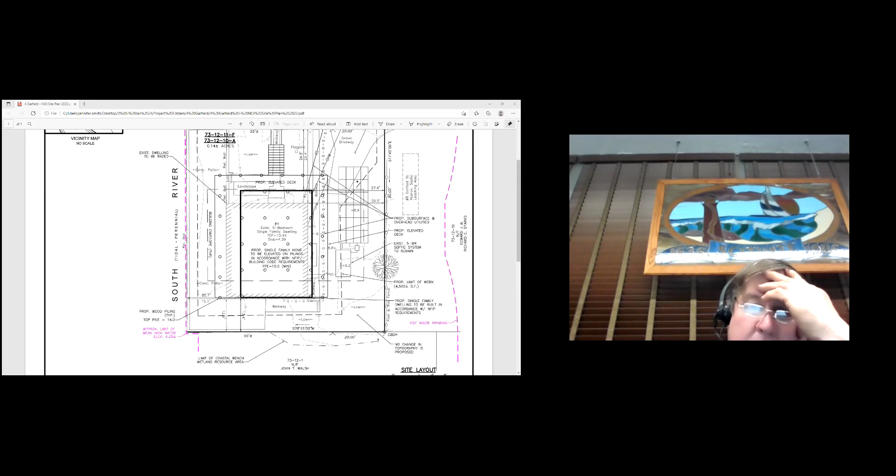So what we try to look for, Mr. McDonough, when these projects are done, is an improvement of the site and hopefully a reduction in impervious areas. And so on the left side of the house, towards the septic system, is probably going over a couple of feet and covering an area that's right now pervious. Well, again, you mean the right side? On the side of the new house that's towards the septic system, yeah, about 2 feet closer to the septic system than where the existing house is. Yes, so there's an area that's pervious that's now going to wind up with the house over it.

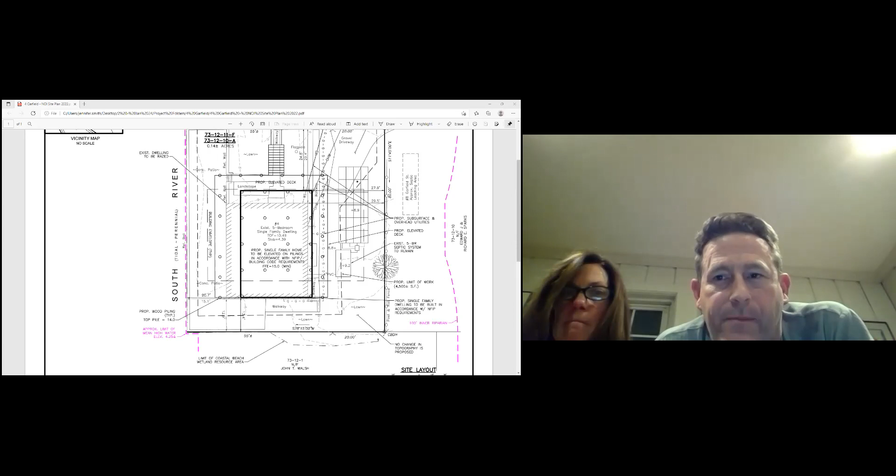Is there a place on this site that you could reduce the impervious areas? To that comment, yes—that side of the house has a concrete walkway that goes out further than the proposed house, you can see it outlined, it's hard to see but it's there. We would remove that entire strip, maybe 3.5 to 4 feet wide by the length of that side of the house. So we might lose a foot with the house overhanging what's currently there, but we'll gain 2 to 2.5 feet by the length of the house of pervious area.

This is Greg Moore speaking. I'd add that the elimination of the foundation underneath the existing house, versus going up on pilings, is going to allow for more free flow of water during any significant flooding event. Yeah, I don't disagree, Greg. We're not necessarily concerned with impervious surfaces as far as creating an increase of rate or volume of water, as opposed to, in this case, being concerned about it deflecting storm runoff to an abutter, and that's greatly alleviated by this.

I don't disagree, it's just that in this particular home there's a great deal of patio. This flagstone patio goes right to the edge of the riverfront, or coastal beach—in fact it probably goes out onto it, but it's been there a long time, so we're not looking to remove it. We're just looking to see if we could get some additional impervious reduction. If there's a walkway or some area that could help with that, I think that would be a good thing, that's all. And I do agree with you, Greg, that having flow through there would help. I'm happy with that. Anybody else?

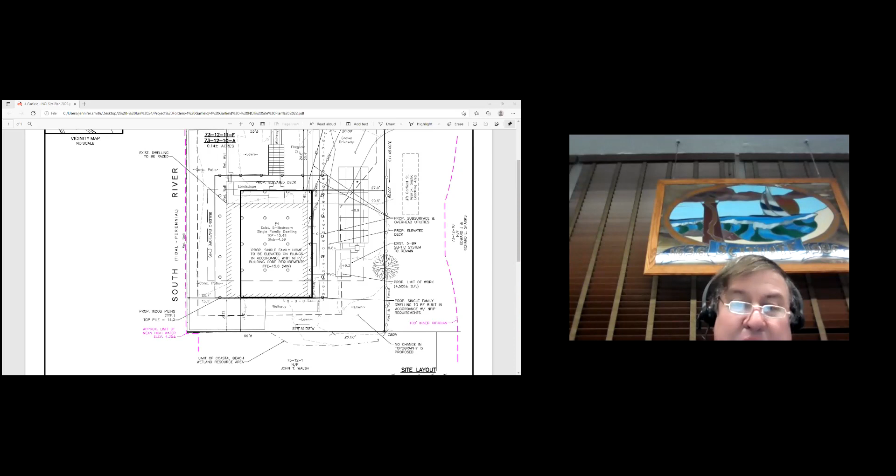Right, and if they're not regrading—it is terraced. Rich, have you been out there? Yes, it is, it's terraced. I think I realize what you're saying, and I imagine that's been there for a very long time. Over the years it's probably been maintained to some degree. That flagstone goes to a little tiny wall or a step down onto the beach, if I recall correctly. And then it's terraced up by the front of the house. That's all I had.

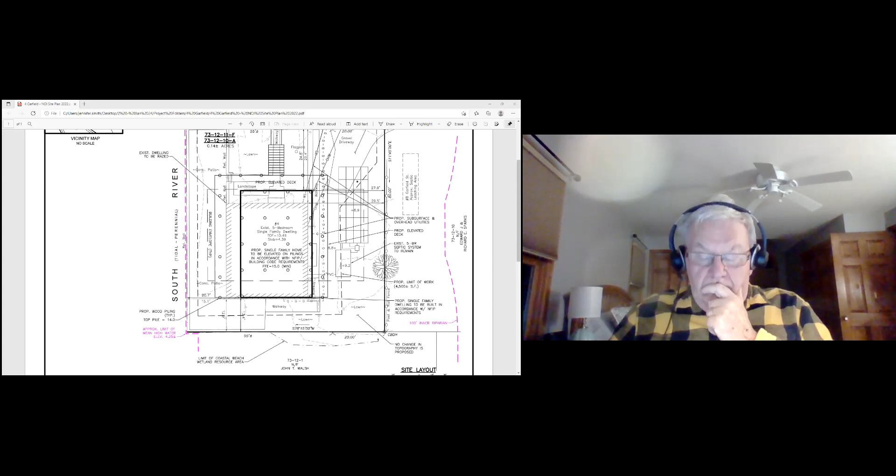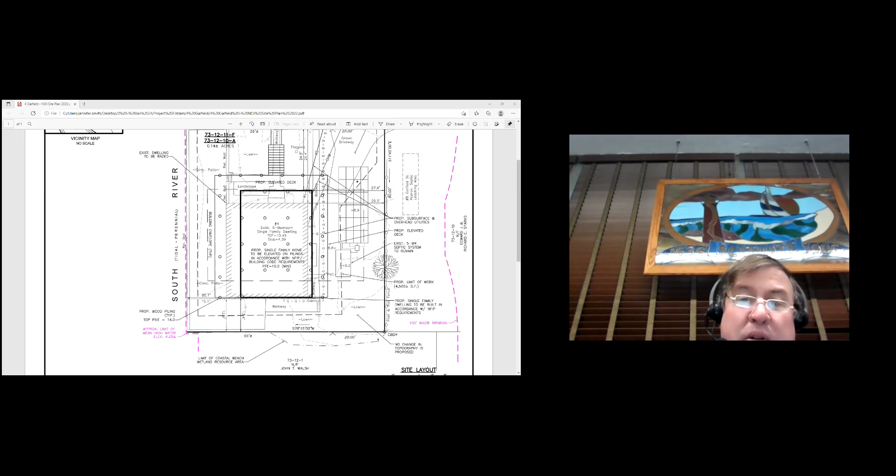Okay, I'd much rather see as much impervious material moved as is feasible, and I do agree that elevating the house and having that wash through helps. So is that going to be like a crushed stone or riprap or something, Greg, underneath the new house?

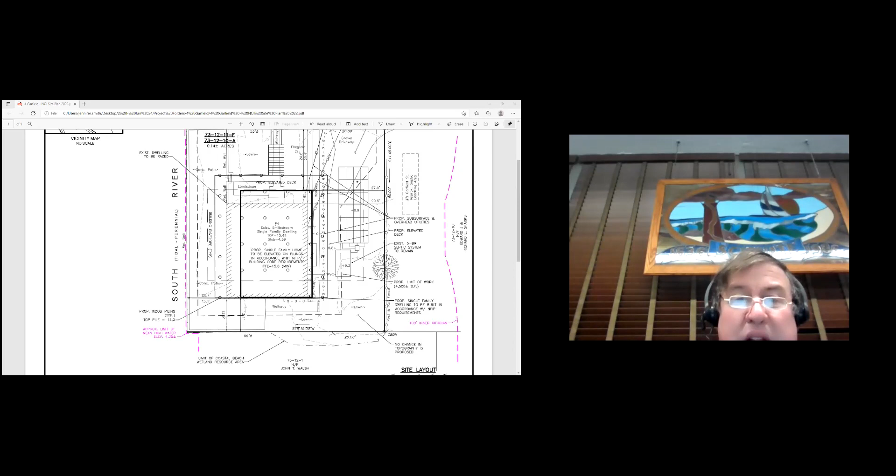I think we would just put crushed stone underneath the new house. You might want to put something a little different, I don't know how much overwash runs through that area. It's not terrible there usually, not like the far north end of Humarock. It's way down the south end. You don't want a bunch of crushed stone washing out.

Okay, Frank, if we close this, do you want to accept the offer they made to remove that walkway? Yeah, I would think that'd be good, but I think we need to be clear about it.

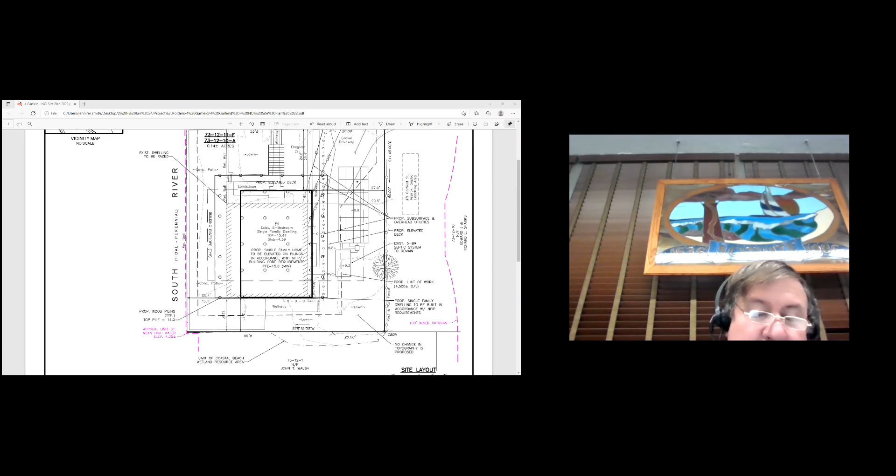So I'll make a motion to close with the condition that the walkway be removed and made pervious. I don't mean to sound nitpicky about this, but we have a situation further north that's gone on for way too long because we weren't clear on what was going to stay and what was going to go. So also there's going to be a condition about Chapter 91 licensing required for any work on the wall on the South River, which is a separate file.

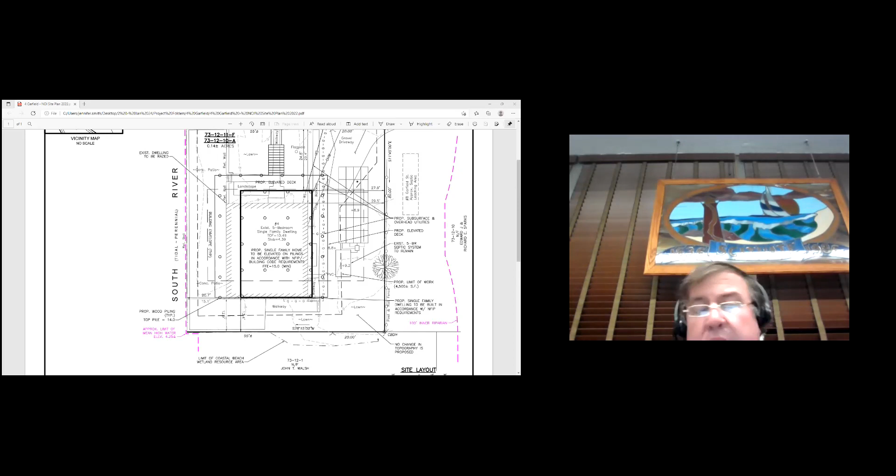So, Lisa? Or Joe? Can we unmute them? Sorry, gotta mute them - there they go. I think you're on. No, there they go. Hey, hi, Kevin. Hi, Kevin. Oh, wait a minute, lost them. We'll get this someday.

I think you're on. Okay, so like you said, to be clear and specific so there's no confusion, the walkway that is abutting the driveway slash septic system side is the one we're talking about removing. Yes. Okay, perfect. Yep, great. Thank you very much.

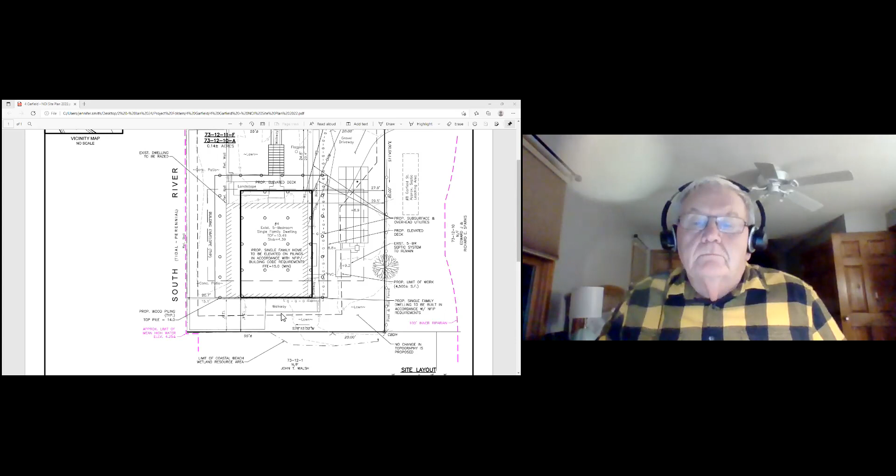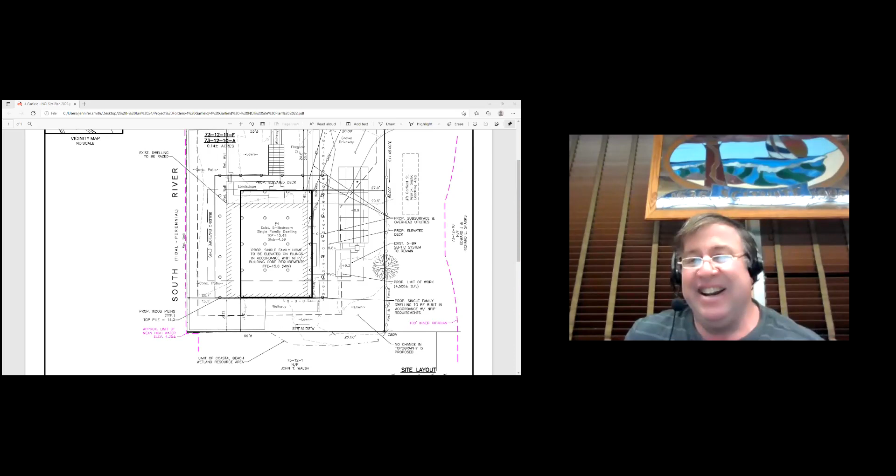Okay, can I get a motion? I made it. Oh, you did? Did I get a second? I'll second it. Brendan beat you to it, Jen. All in favor? Penny, aye. And Brendan? Oh, he seconded it. He did? Yes, he beat Jen, sorry. It's not even 7 o'clock yet. All right, great. Okay, thank you very much. Good luck. Thanks, Greg.

Do we want to do the minutes or go to Toll Brothers? Yeah, let's do the minutes, get them out of the way.

I make a motion we accept the minutes of December 6th, December 20th, and January 10th as written. I'll second that, thank you Brendan. All in favor? Richard, yes. Jen? Yep. Frank, yes. Great, thank you.

Okay, Toll Brothers, do we have them on? Yeah, there's Bill Orenberger on, and also Dave Buckley. So I'm going to unmute them. Well, what if we just unmute Dave? You're a wiseacre, they should both be on.

Okay, so anyways Frank, we've asked Toll Brothers here for our enforcement order. As we know, we've been dealing with quite a bit of things on the Seaside at Scituate site relative to the stormwater permit and the SWPPP, specifically incidents of severe storms that occurred in June of last year. Toll Brothers has done a lot of work that you and I, and the planning board, have been involved in overseeing, making sure they've come into substantial compliance with those permits. So this meeting is just to bring it hopefully to some kind of closure and move forward. That's a good recap.